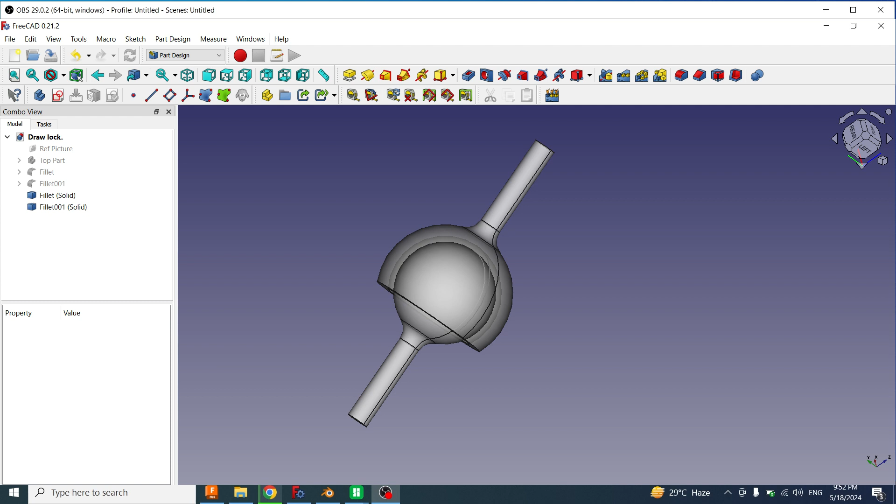Ball joints have two parts: one is holder and the second is ball. So first we will start from the holder. I will open FreeCAD and go to the Part workbench. First I will create the holder.

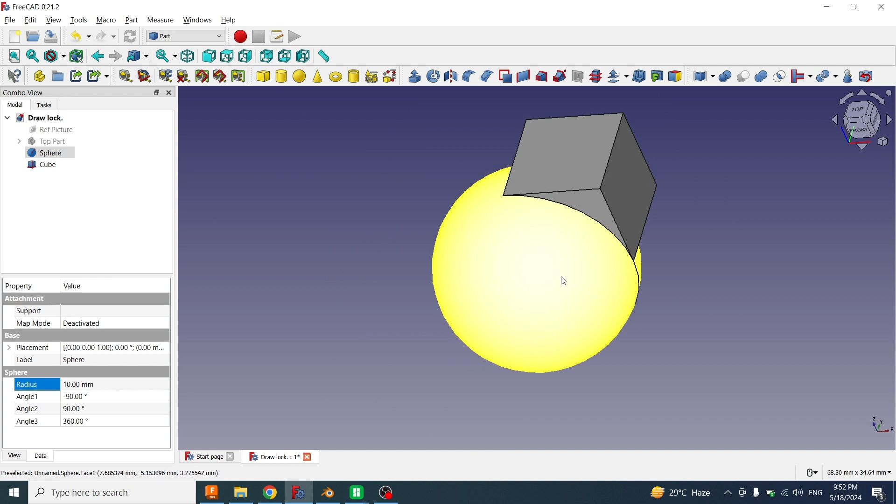For creating the holder I will take a sphere, and the radius of the sphere will be 10 mm. Now I will take a box, double click on it, and change the height to 40, length 20, width 20.

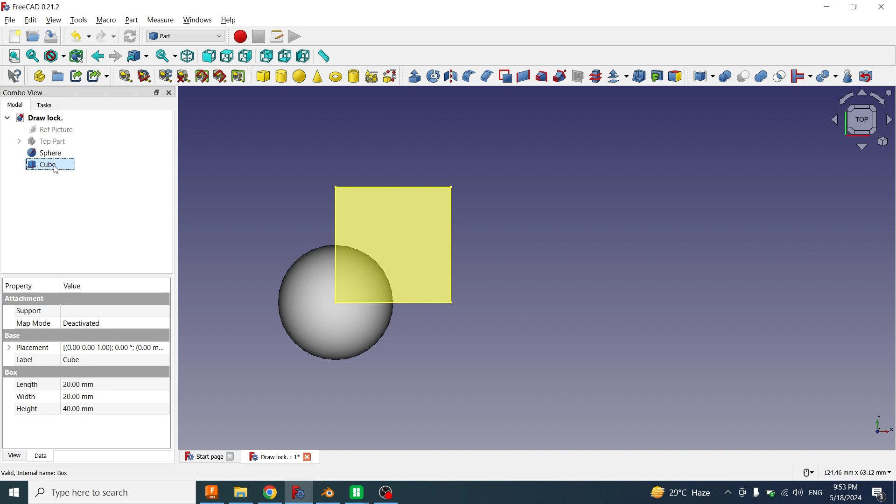I will go to the top view, right click on the cube, transform, and adjust it. I think I need to increase the length and width of the cube.

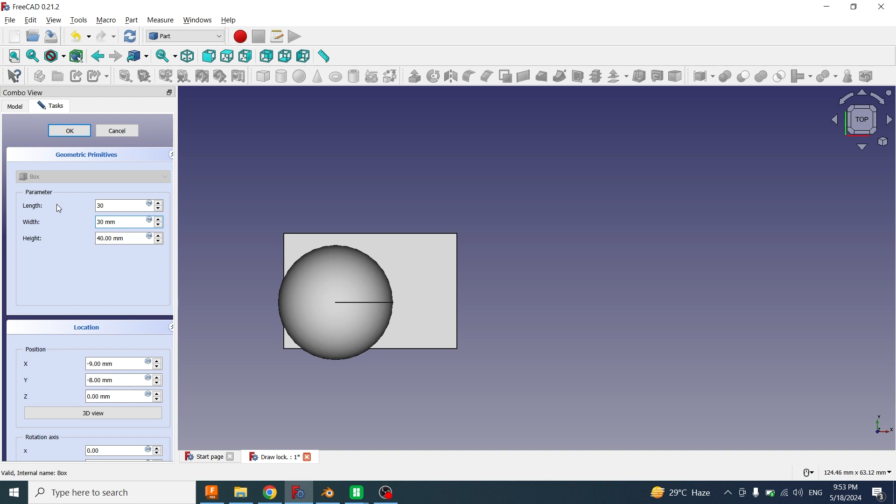First I double click on the cube and change the value from 20 to 30. Then right click, transform again.

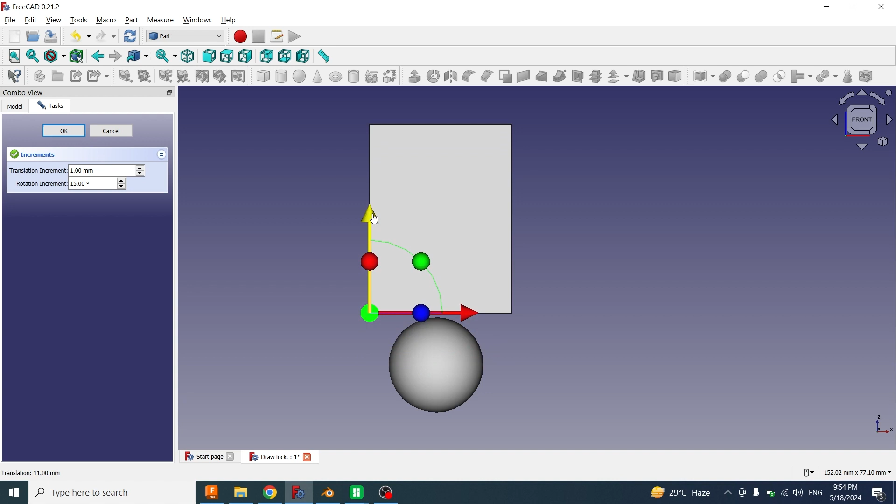Now I will go to the front view by pressing 1 from the keyboard, then adjust the position of the cube from where I want to make a cut.

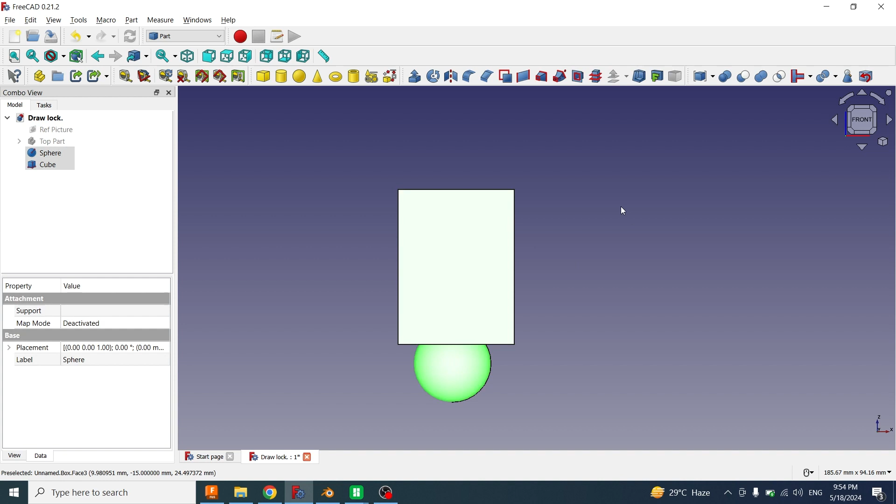Now I will make a cut here. First I will click on the sphere because I want to keep it, then select the cube by pressing Ctrl. Now I will go to Part and Boolean Cut. Now the sphere has been cut from a specific portion.

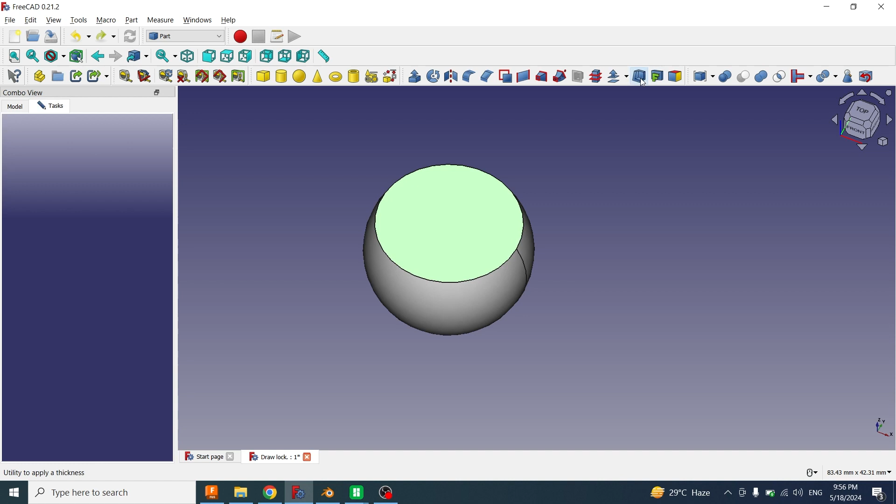Now I will make this hollow. I want to remove this face and give thickness to the boundaries of the sphere. First I will click on this face, then Thickness, and adjust the value. I will keep it 2 mm.

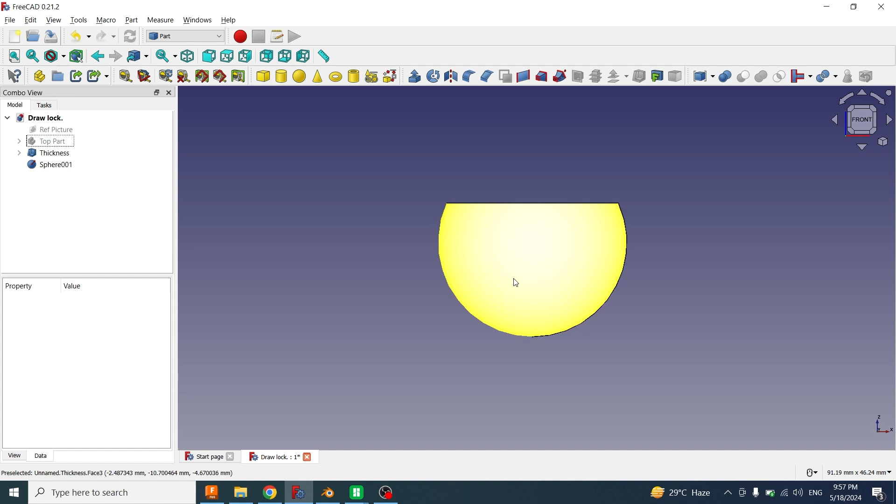Now you can see the inner part of the holder is empty. Now I will create a sphere, the second part of the ball joint, a ball sphere. I will click again on Sphere. First I will decrease the opacity of the holder so that I can see the sphere clearly.

I will click on Thickness, View and Transparency, and keep it at 50. Now the inner sphere is visible. I will click on the sphere and go to Data, giving it a radius of 8 mm.

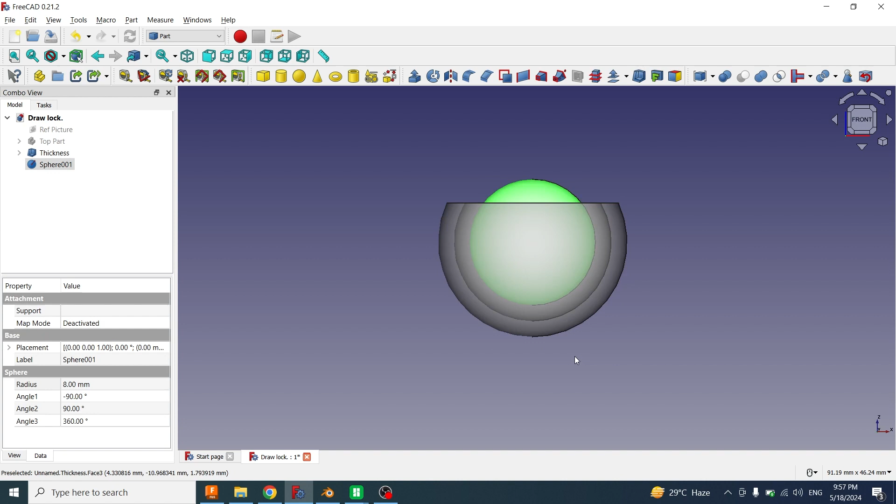I will go to the top view and place it accurately. One thing you must keep in mind is that the diameter of this cut must be less than the maximum diameter of the sphere, otherwise the ball will not be held into the holder. The diameter of the inner wall I will keep at almost 9 mm.

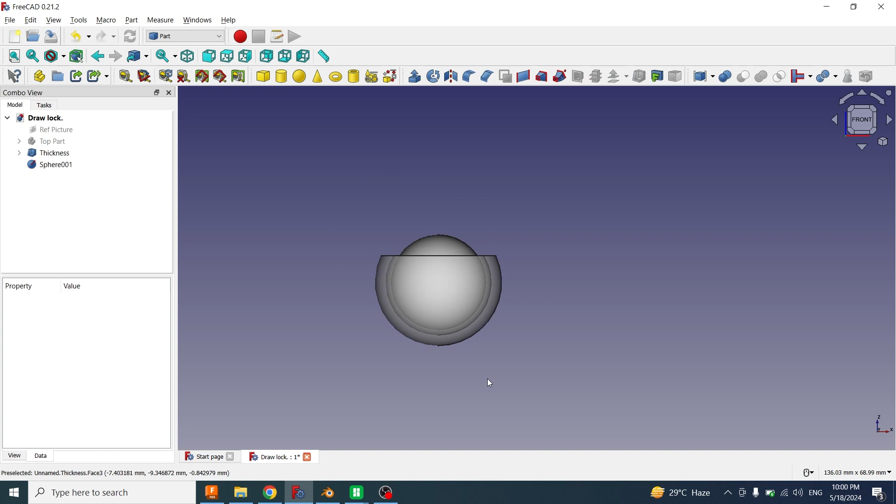Now I will create another cylinder. I will click on it, right click, transform, and move it to the upside.

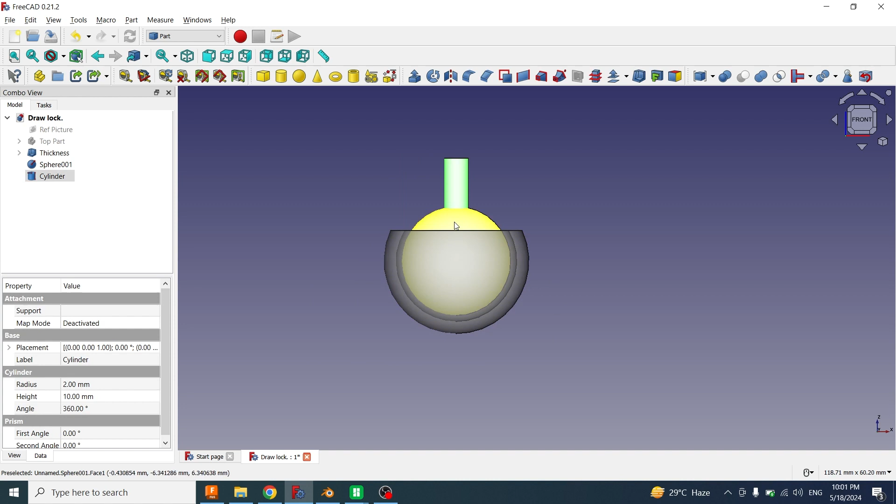Now I will select this one and select this one by holding Control, then go to Part, Boolean, Union. These two have been joined together.

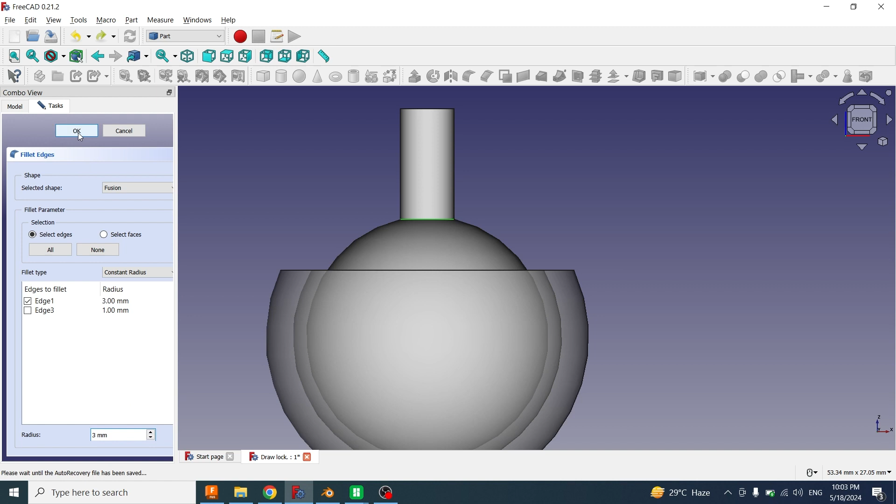Now I want to make this part a little rounded. I will select this edge, apply fillet, and increase the value to 3 mm. Now this has been rounded.

Now I will create another cylinder at the bottom side for the holder. I will select another cylinder, right click, transform, and move it to the bottom side.

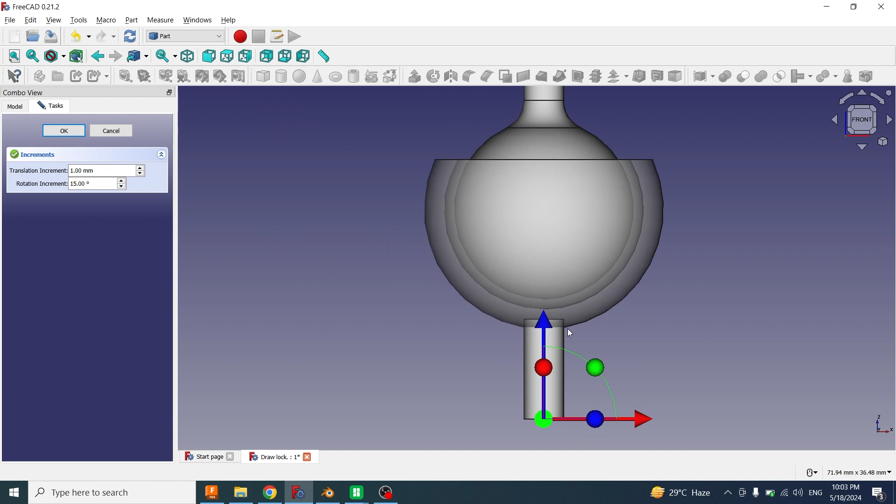Now you can see this cylinder is intersecting the holder. While changing the position of the cylinder, it must not cross the thickness of the holder, otherwise it will disturb the movement of the ball inside the holder.

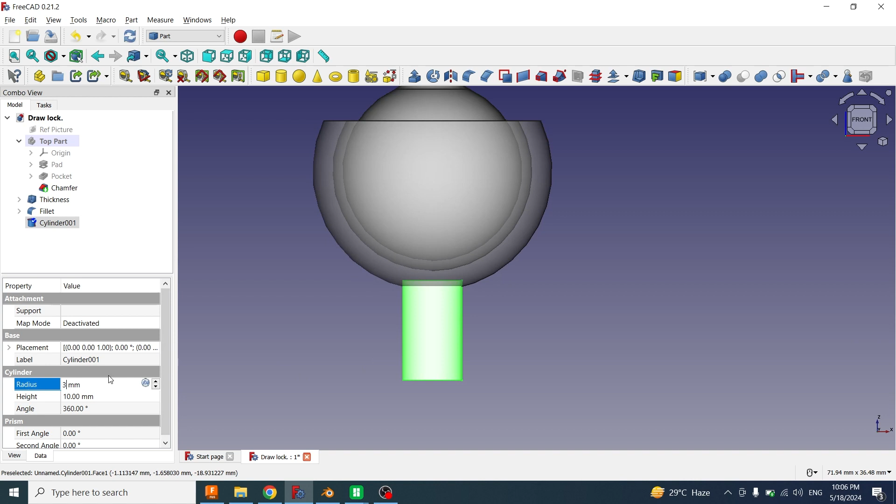Now I will click on this. If you want to make the cylinder thick, you can change the radius to 3 mm. This becomes thick. Now I will select this one and this one and apply a Boolean operation union.

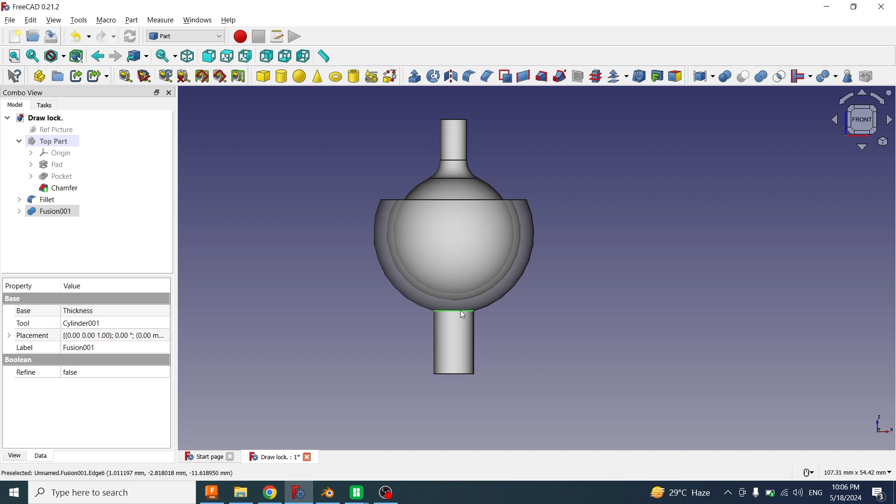Apply, close. Now the union has been applied. Now I will select this edge and apply fillet, giving the value 3.

If I want to increase the height of the cylinder, first I will click on this one, click on the arrow, then click on this arrow, click on cylinder, and increase the height. Let's suppose I make it 20. The height has been increased.

If we want to change the height of this cylinder downside, we can do this by giving the height a negative value, because giving the height a positive value will disturb the shape of the holder. If I do 20, now you can see the shape of the holder has been disturbed.

How can we fix it? Control Z. First I will remove the fillet, then remove the pin, and then increase the height of the cylinder. Suppose 20.

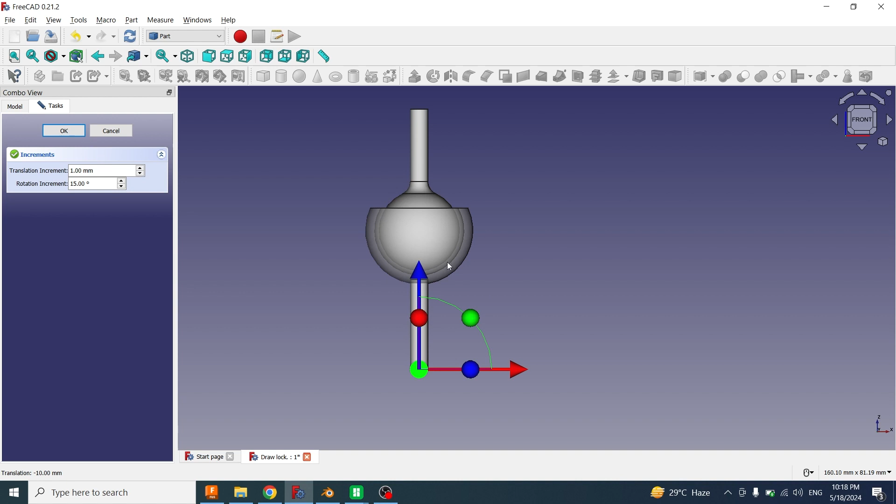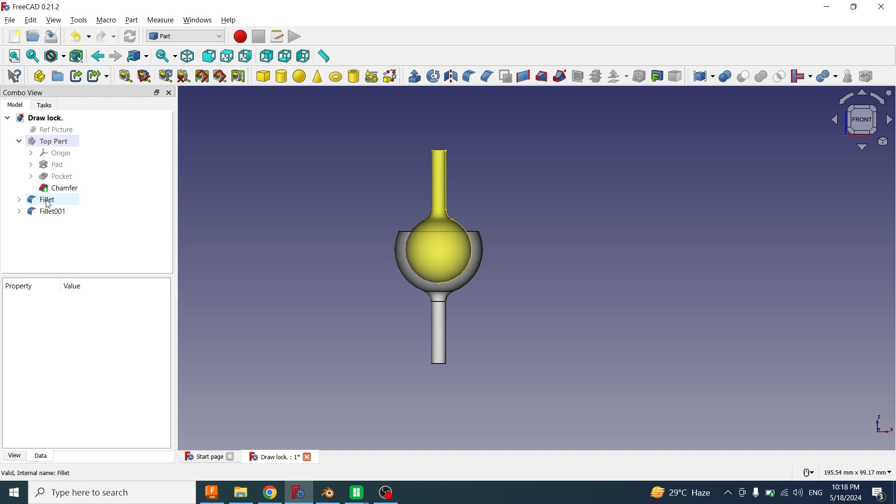Now I will click on this fillet, go to Part, convert to solid. Again I will go to the fillet one. This is the holder part, converted to solid.

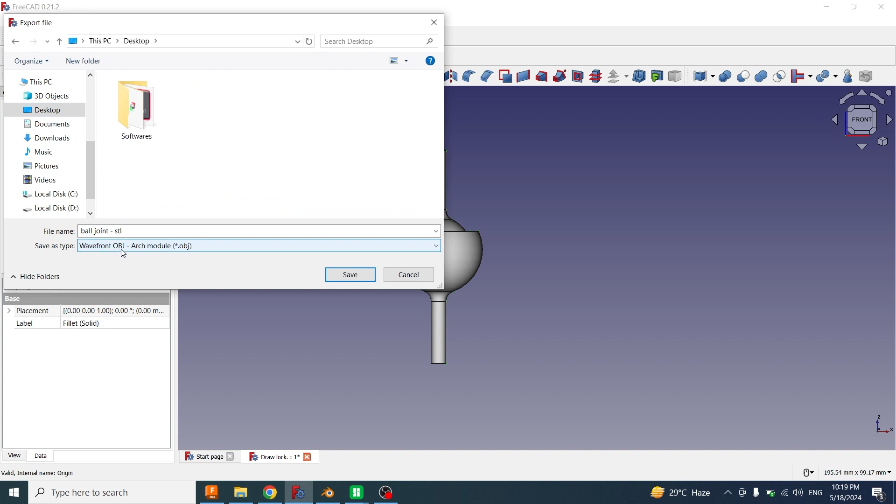Now, if you want to convert these two objects into an STL file, first select this solid, then select the other solid by pressing Control, then File, Export, Desktop, Ball Joint, STL, and the file type must be STL. Save.

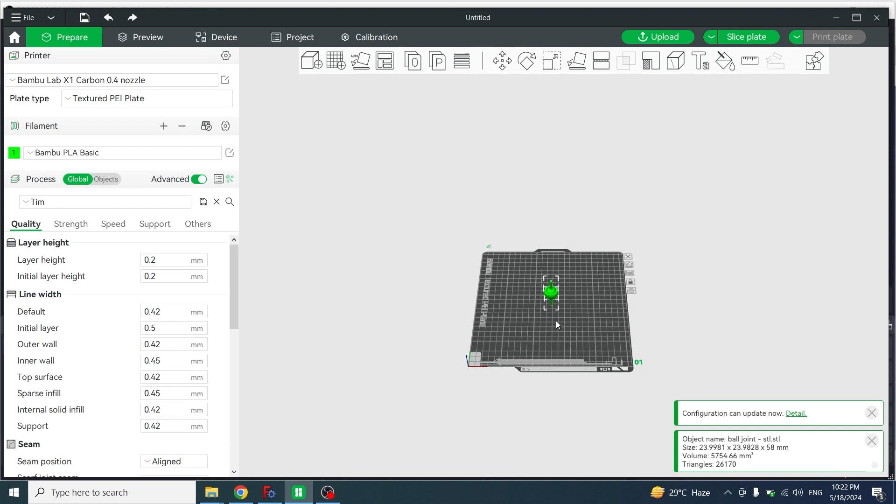We'll go to the desktop. This STL has been created here. I will double click on it and open it in Bambu Studio. Now our ball joint has been opened into the Bambu Studio. I will zoom it and create it. Our ball joint has been completed.